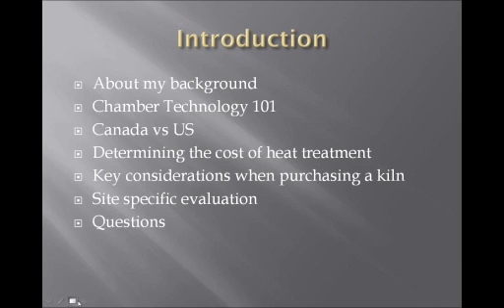So first off, just basically out there on the market, there are dry kilns and heat treating chambers. Dry kilns have been around forever, and the theory behind them is using heat and air over a long period of time to remove moisture from wood to bring that moisture content down.

When ISPM 15 came about, it was realized that the dry kilns could theoretically reach the 56/30 criteria or Canada's PI-07 criteria. In a lot of cases, though, because they're vented and they're used for drying, it's a challenge to meet wet bulb requirements, and a lot of those systems need to have moisture added towards the end of the cycles. Heat treating chambers are generally not vented.

We want to keep as much humidity in them as possible to allow for proper transfer of heat into the wood. And they're designed basically to heat wood quickly, especially in the U.S. where core probing is allowed, to reach that 56-degree 30-minute mark in as quick and efficient a manner as possible.

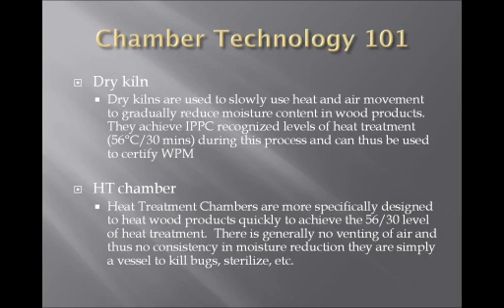A couple of pictures that I'm going to show you here. This is just to give you an idea of kind of how air movement works inside of a chamber. You'll see a heating vessel, air movement. In that open area, you can imagine your pallets or your stickered wood products there.

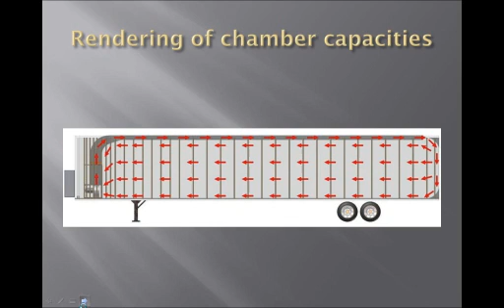To the next slide, this is just an example. If you are treating stickered lumber as opposed to pallets, you will need to allow for air to pass through, and it's a consideration when you're looking at the volume necessary in your chamber, because you do need to allow for that airflow to be able to meet the criteria.

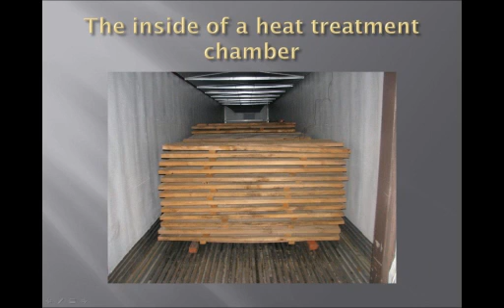Something that we have unique to Canadian operations, different than the U.S., is a wet bulb. This is a picture of a very simple wet bulb. The theory behind a wet bulb is that air will pass across water. There is a wick that dips into the water. It artificially cools the probe and creates a wet bulb depression. This is very key when we get into talking about PI-07 in a little bit, because this simple little bucket here actually controls your heat treating cycle.

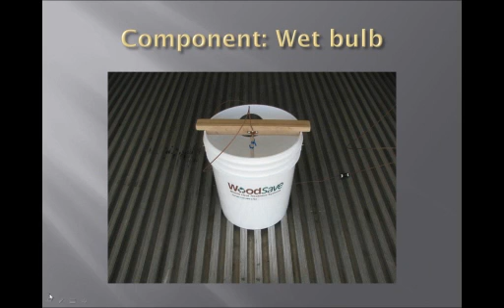Core probes, which we'll talk about as well, are, as you can see from this picture, plugged directly into the thickest part of the wood, and they monitor the internal temperature of the wood or of the pallet. They typically use the thickest piece of lumber within your chamber. In the U.S., 3 of these probes are used to monitor the charge, while in Canada we use 1, which will signify the start of the charge.

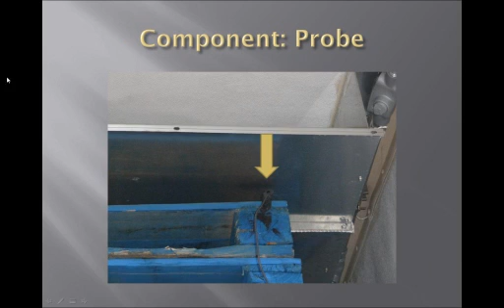So I've covered a little bit here on the U.S. versus Canada. Heat treating in the U.S. is run and regulated a little bit differently than Canada, and therefore some of the kilns available out there may not be tailored for Canadian operations.

In the U.S., as mentioned, 3 core probes are plugged into the product throughout the chamber. They're monitored. They hit 56 degrees Celsius. They're held for 30 minutes, and your charge is complete. Therefore, you can hear of different kilns cycling in an hour to an hour and a half and meeting ISPM 15 criteria. In the U.S., the ALSC, or the American Lumber Standards Committee, oversees the heat treatment. All of the inspection bodies are very much independent, and they work on 12 inspections a year.

In Canada, we're just a little bit different than the U.S. The CFIA still essentially regulates, and they've provided us with a document called the PI-07. The PI-07 is essentially your heat treating Bible, and if you choose to operate a kiln in Canada right now, you're going to work with either the PI-07 or have a site-specific evaluation done. The PI-07 involves ambient air temperatures, the wet bulb which we showed you, and a core trigger start, and then a series of time criteria based on the lumber thickness and size that you're treating. The link down below will take you to a copy of the PI-07. I'm going to touch on a little bit more of it here as it pertains to the treatment of pallets.

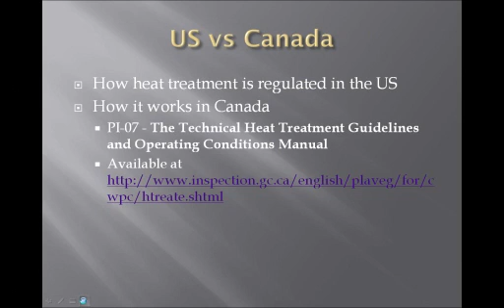Schedules are something that you'll hear a lot of talk about, and they're the operating parameters found in the PI-07 or given to individual sites by a site-specific auditor. What these schedules refer to is the time and temperature that must be met in the treatment cycle to achieve the compliance for Canadian regulations. They vary by lumber species, they vary by lumber thickness, and if you are going to operate and treat with your chamber a multitude of sizes, you're going to need to be familiar with multiple cycles.

They can be influenced by the start temperature, which must be 15 degrees Celsius, and the level of wet bulb achieved, and you can also vary the time by playing with levels of wet bulb, the top end of that temperature, etc.

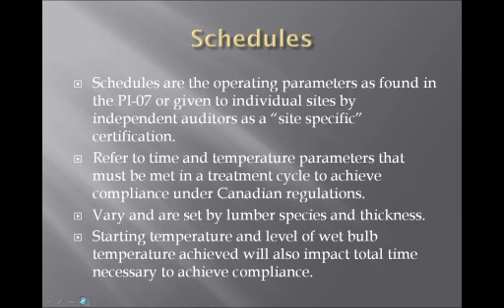Site-specific evaluations, what they do is if you have a chamber, you'll bring in an approved auditor, and there's a few of them in Canada, and they will test your chamber against the PI-07, and they will determine at what point in your chamber the proper criteria is met. We found that with site-specific evaluation, you can reduce your run times by up to 50%, and we hear varying reports of costs ranging anywhere from about $5,000 up to $12,000 or $14,000, depending on the number of cycles that you're going to get. It's a key consideration when buying your chamber.

If you're going to establish the volumes that you need to run, the amount of cycles that you are going to need to run to be able to meet your customer demands. Because of the PI-07 cycles taking the better part of the day, site-specific evaluations will sometimes allow you to be able to squeeze 2 charges, 3 charges in a day, as opposed to the 1 that you would be forced to have with PI-07.

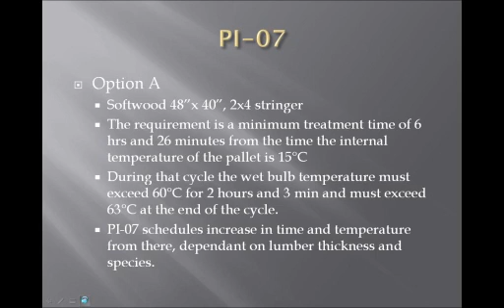This kind of gets into more of the meat and potatoes here when you're operating a chamber and you're considering a chamber for your operation: how much is heat treating going to cost? Pretty easy in Canada because of the PI-07, and it's basically telling you exactly how long you need to run. So you're going to need to calculate the amount of energy in the time specified in the PI-07. So I use a fairly simple formula for figuring out that cost, and it calculates energy only. You're going to have increased costs in stamping and movement, but your shop efficiencies are going to dictate those. Hard costs can be figured out pretty much as follows.

I'm going to use the electric kiln here just because the numbers are fairly simple. So in an electric kiln that's drawing 60 kilowatts per hour over a runtime of 6 hours and 26 minutes, the cost is fairly simple. 60 kilowatts times, I use 15 cents per kilowatt delivered in Ontario. Depending on where you're operating, that may be a little bit different. I believe Quebec is quite a bit less, and maybe the West is a little bit less as well. But it'll give you an operating cost of $9 per hour.

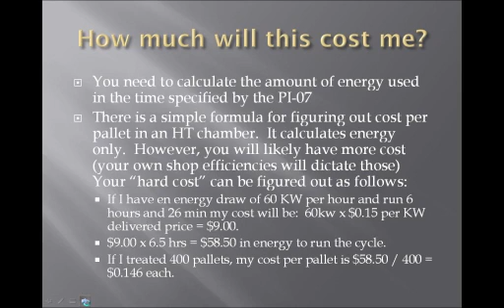We're going to take that $9, multiply it by the 6.5 hours that you need to run your PI-07 schedule, giving you $58.50 in energy to run the cycle. Based on the number of pallets in the chamber, I'm using 400 here, it gives you an energy cost of about 15 cents per pallet. That number is going to vary according to the efficiency and the size of the chamber that you're operating.

And if you're going to be using or looking at gas chambers as opposed to electric, you still need to factor in your electrical costs as well as the consumption of cubic meters of gas per hour in that cycle as well. I would think the numbers should be available from the different manufacturers, but usage is also going to vary with gas by location, ambient climate, relative humidity in the chamber, altitude, a couple of different things.

These figures, when we look at the cost to operate, again, this is just your bare bones hard costs. You really need to evaluate your setup, the amount of movements that it's going to take to load and unload, stamping, administration, inspections and inspection fees, and these all need to be incorporated before you can determine your overall operating cost.

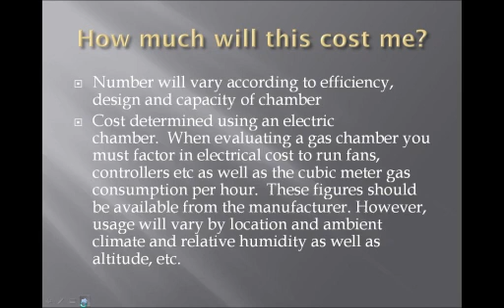Here, just bear with me for 1 second here.

Having the experience in operating a chamber for many years and building chambers and also running a pallet shop, oftentimes I've looked and wondered, do we really need a chamber for our operations? In my case, it's definitely yes. We not only retreat repaired pallets, but new pallets, source alternate materials, and do heat treating for other companies. So for me, it's become a very integral part of our business.

Some of the things that you need to consider is retreating repaired pallets. And in Canada, we're allowed to repair under the 1/3 repair rule. Hopefully you're all familiar with that, where if you take a pallet that has an existing stamp on it, if 1/3 or less of the components of that pallet are broken, they can be replaced with heat-treated lumber. That pallet can be moved on down the line and sold as HT.

The other line of thinking is just repair everything, don't worry about that, and retreat them. You'll need to be able to evaluate your costs one versus the other. I am very pro heat treatment because of the traceability of the product, and it's a heck of a lot harder to cheat that than it is doing it with the 1/3 repair rule.

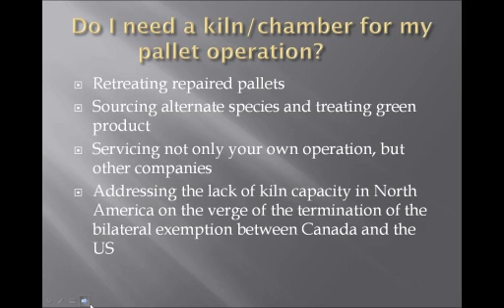Some different factors to consider. Again, we manufacture chambers here. There are other manufacturers out there. From everything that I've seen, there's a lot of very good products there. So you need to be able to look at all the different options and consider which chamber is best for you. Ultimately, the best advice that I can give you, especially operating in Canada, is ensuring that your chamber is going to be PI-07 compliant.

I've seen this numerous times where US-built equipment comes into Canada, it's set up for core probe monitoring, it arrives, and all of a sudden you as the operator can't use it because it's not compliant here. Do your homework, ensure that you have all of the tools necessary for your kiln to function under PI-07, or there could be delays and further upcharges.

Other things to consider that we've seen over the years is bigger better. Stateside, the tendency is to look at large units, lots of BTUs, and very, very fast turnaround. In Canada, again, because of the PI-07 and the length of time necessary to treat, smaller chambers, smaller capacity, and more efficient chambers may be a better way to operate here from a price point.

Chambers that I've seen as well, they operate better when they are full. So if you've gone and overbought a chamber, you're either not going to be operating it or you're going to be operating it at half full. And if you're operating at half full, you lose a lot of efficiency. Therefore, your cost per pallet is going to go up, and essentially in this operation, cost per pallet is the key.